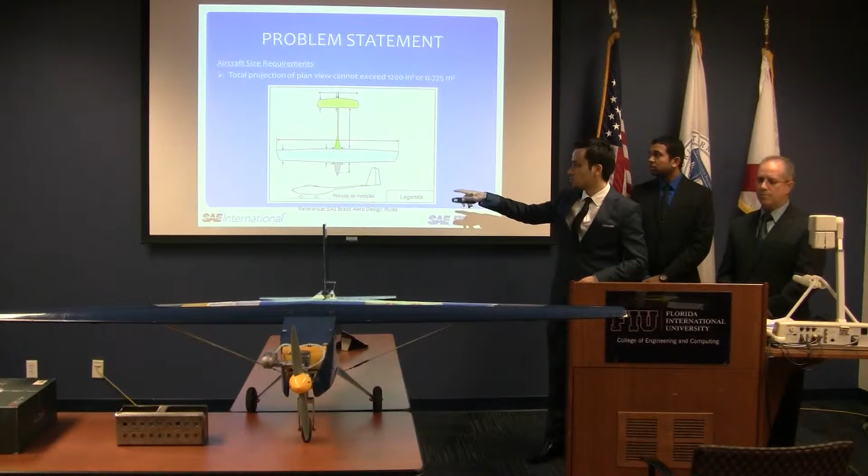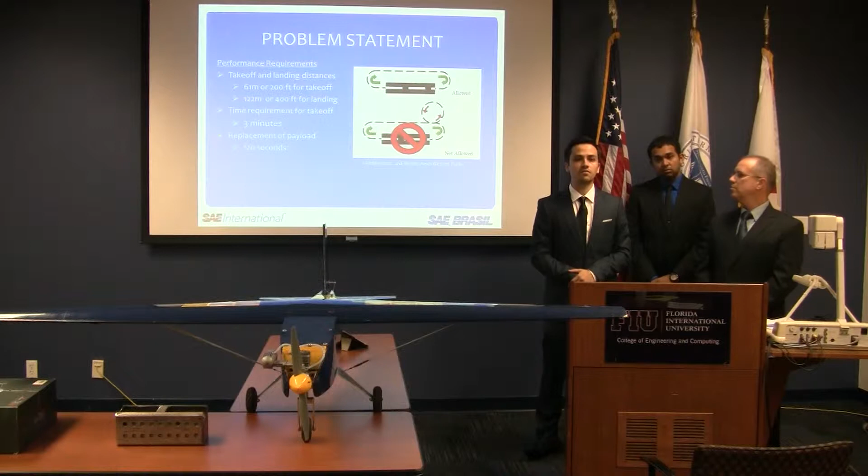A major geometric design restriction is that the top view from the airplane, the area as it's seen from the top view, planform view, cannot exceed 0.775 meters squared. Everything counts: wing, elevator, fuselage, motor, everything counts against you. This is taken from the SAE design rules. We have to be able to take off within a time span of 3 minutes from the moment the indication is given. We have to take off within 200 feet runway, and be able to land within 400 feet as well.

Some of the limitations. The rules give us, for engines that we can choose, we can only go with gas-powered engines. They gave us these engines, and we had to compare them and kind of do trade studies to see which one of them was the one that suited this particular aircraft the most, and we could not use metal propellers by rules.

In terms of our particular design, we started choosing the airfoil. The airfoil is a very important part of the aircraft, as we all know. Its profile is the one that dictates how much lift you will get, and we wanted as much lift as possible. So we wanted an airfoil with a fair amount of camber.

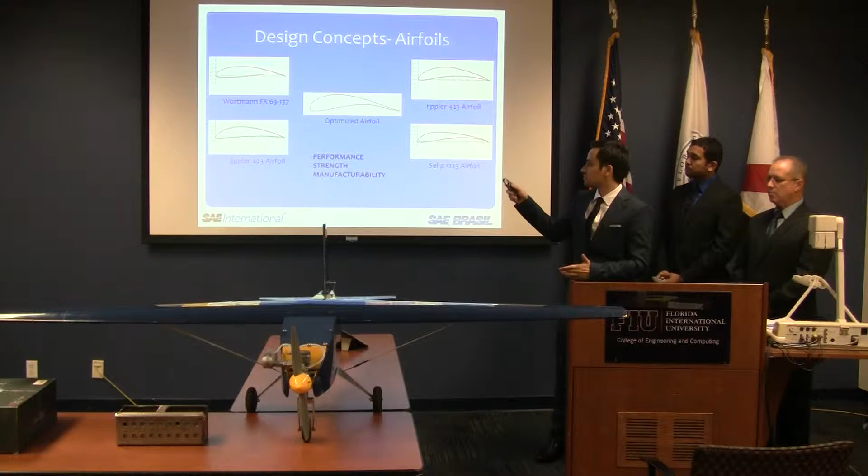Now we had these 5 concepts that came out of the literature that we researched. We compared them all, of course, in terms of strength and manufacturability, performance, lift to drag ratio. The problem with the ones that gave the most amount of lift is the fact that they were very thin in the trailing edge. That's their characteristic usually. So in terms of taking this to real life, to manufacturing this type of airfoils, it's very risky and difficult, because if you have any accident, it'll break very easily.

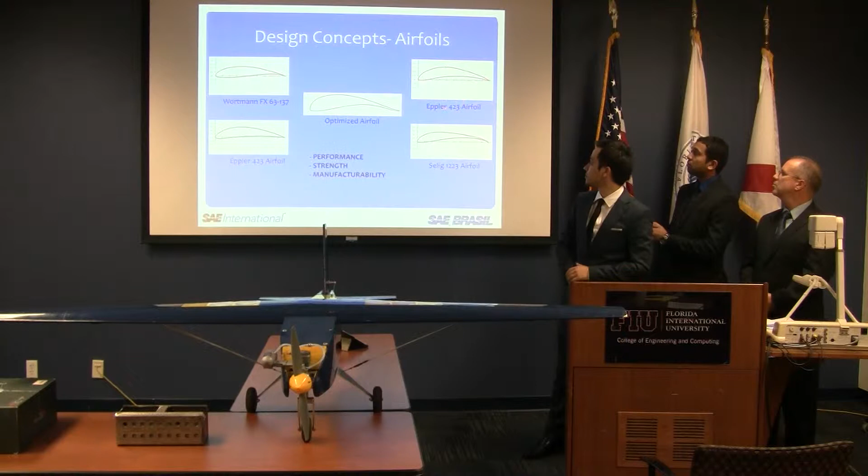So we finally chose, after comparing them all, the Eppler 423, which has a fairly thick trailing edge, but it still provides a very good amount of lift to drag.

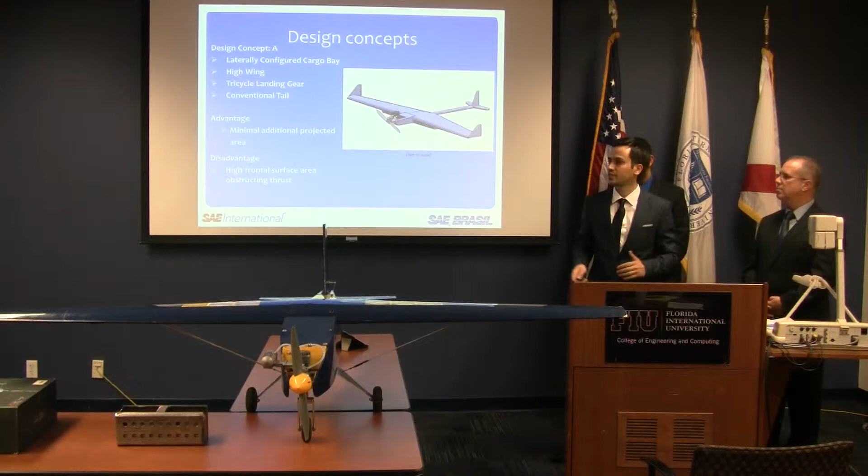And the drawback is that this frontal extra area would obstruct the air coming from the propeller, and potentially cause a reduction in lift. Of course, it was a conventional design. In terms of the tricycle landing gear, it was very conventional. The tail was a conventional tail. So we'll talk about the next design concept.

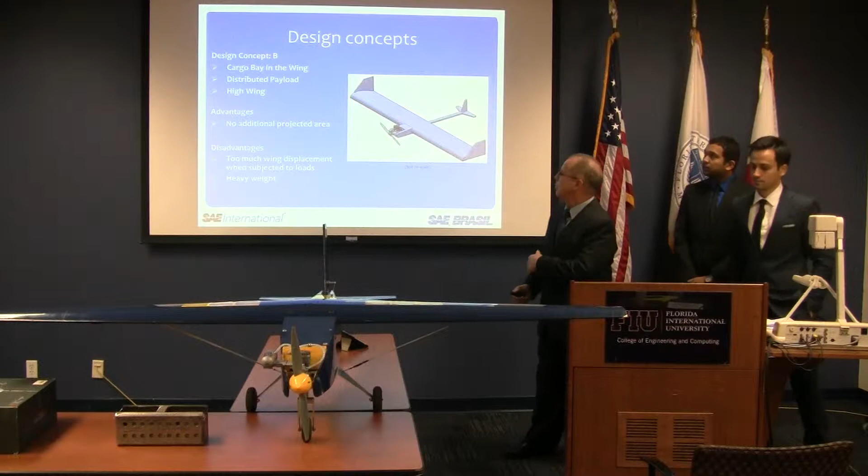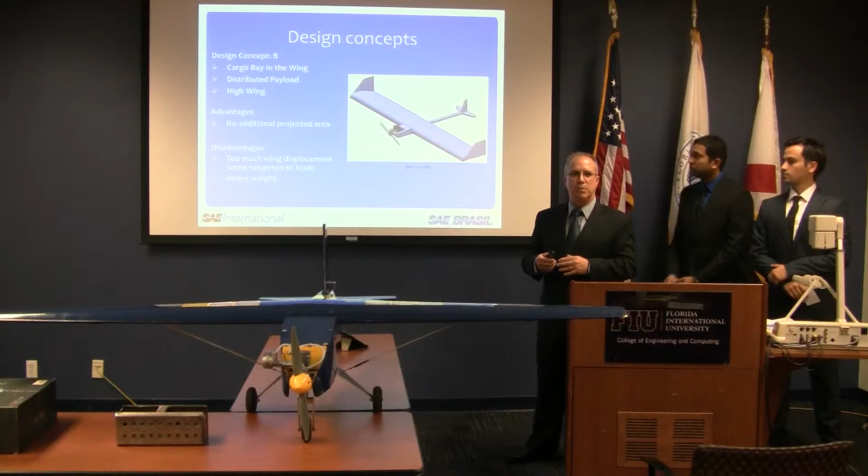Yes, as Andres was saying, after Concept A, we went to Concept B because Concept A was shown to have too much frontal area right behind the propeller, which was not a good characteristic. So in Concept B, what we decided to do was to remove that extra frontal area in Concept A and have the cargo bay distributed throughout the entire wingspan.

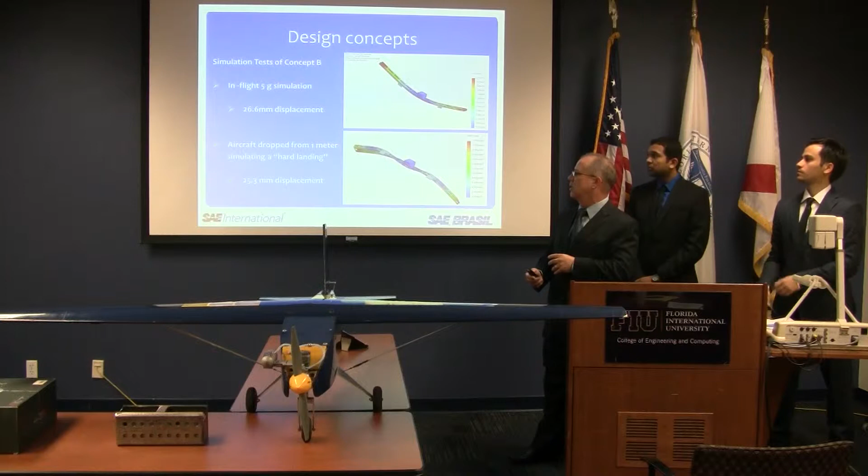Once we did that, as appropriate, we did some structural analysis. In this case, we simulated a 5G in-flight analysis as well as a hard landing analysis. And the problem that showed up during Concept B was that during our structural analysis, it was deemed that the wings were going to have too much displacement. So rather than continuing any further, that concept was rejected. This led to Concept C.

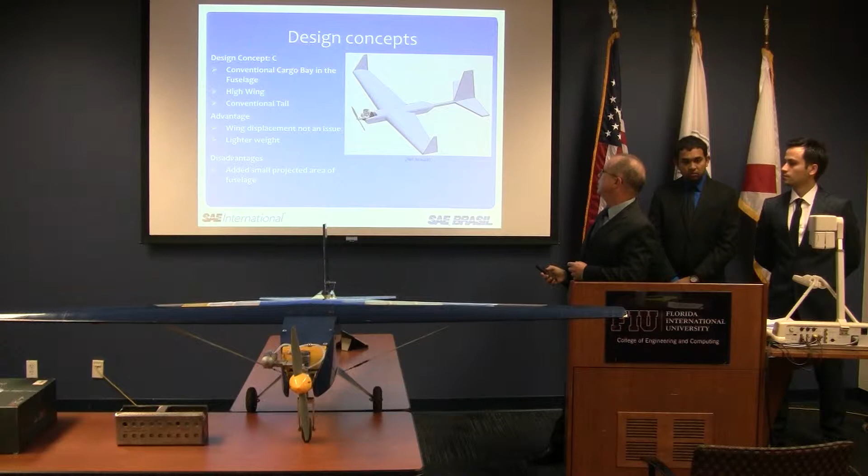In Concept C, we took the payload and we located it longitudinally in the fuselage, and we also tried to minimize the planform area by having a thin boom. Unfortunately, once we started looking at the various mounting options to mount that boom to the fuselage, it just proved to be a little bit too complicated, and we also had some concerns that it was going to be too weak. That led to our final prototype.

In this design, we went from the boom to just a conventional empennage support, which eliminated our mounting concerns, and that's what our final prototype looks like.

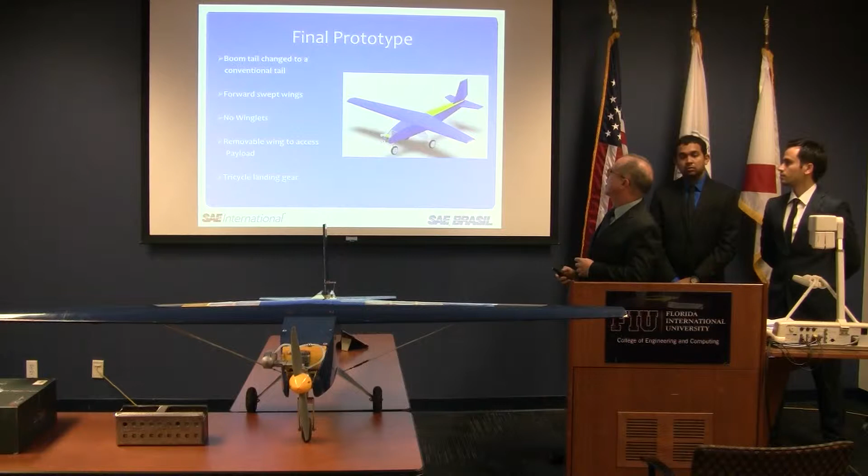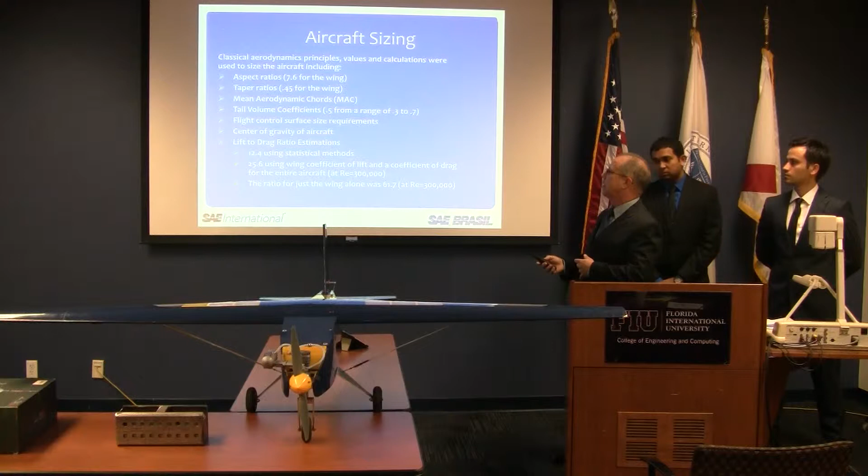Okay, and then once we had our prototype concept, it was time to start doing some more specific dimensions for the whole airplane. And at this point, there were some decisions we had to make. There were some numbers that we had to choose, such as the aspect ratios, taper ratios, tail volume coefficients. And there were some numbers that we had to arrive at, such as the center, the coefficient of drag, or the lift to drag estimations. Those were calculated and estimated.

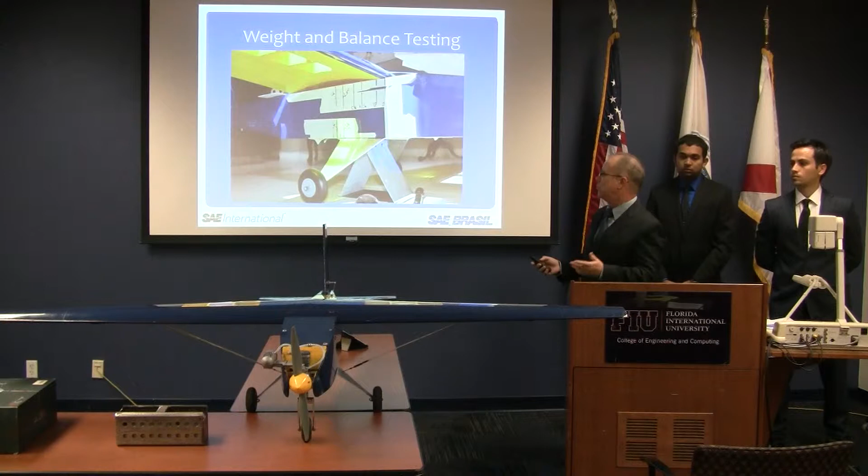Now, one of the things that we deemed very critical during our project is to maintain the center of gravity precisely, or as much as possible, where we wanted it. So as the aircraft got built and as components were being added, every so often we would go ahead and do another validation check of our CG before going any further, in case we still needed to make some adjustments. Because one thing we didn't want to have to do was add counterweight, because that would really take from our desired payload capacity, so we never did have to do that.

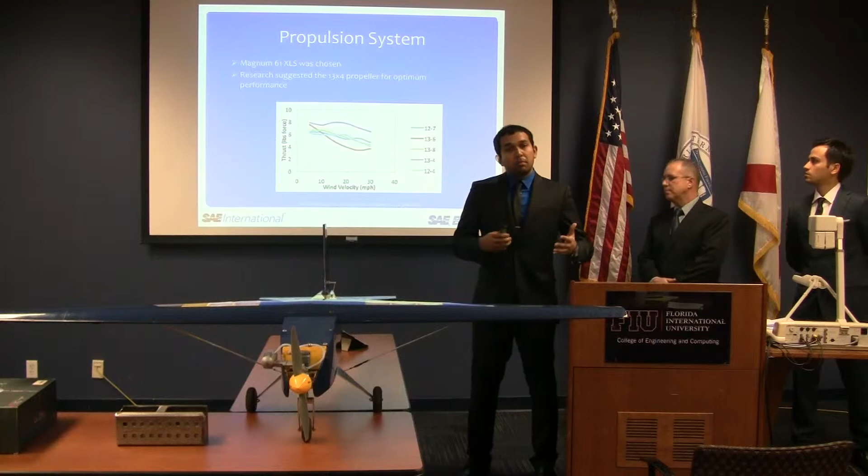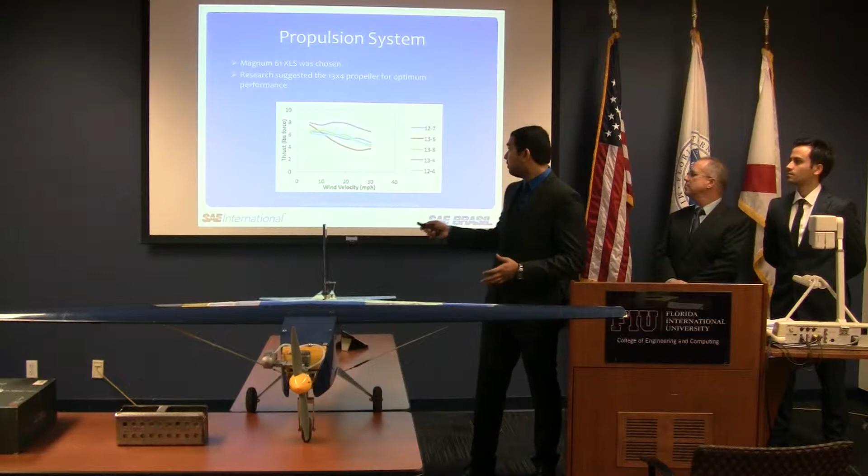Now, choosing the right propeller is the same as choosing the correct tire for a car engine, because the research suggested that the 13x4 propeller was the most optimum propeller for this engine. As you can see in the chart, University of Michigan students did a dynamic thrust test with various propellers, and the 13x4 was the most optimum and provided the most amount of thrust at different velocities.

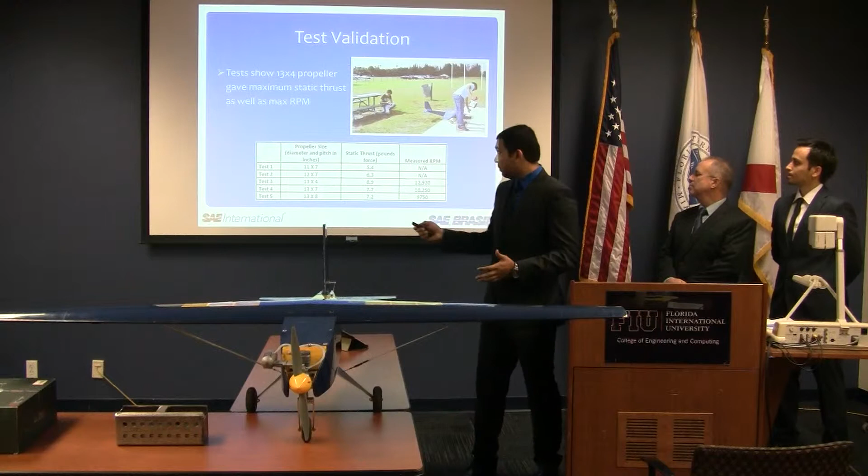After knowing that the 13x4 propeller was the most optimum, we decided to do some test validation of our own. As you can see in the chart here, we compared different propeller sizes, some recommended, some not. And the 13x4 was the clear winner in static thrust and measured highest in RPM.

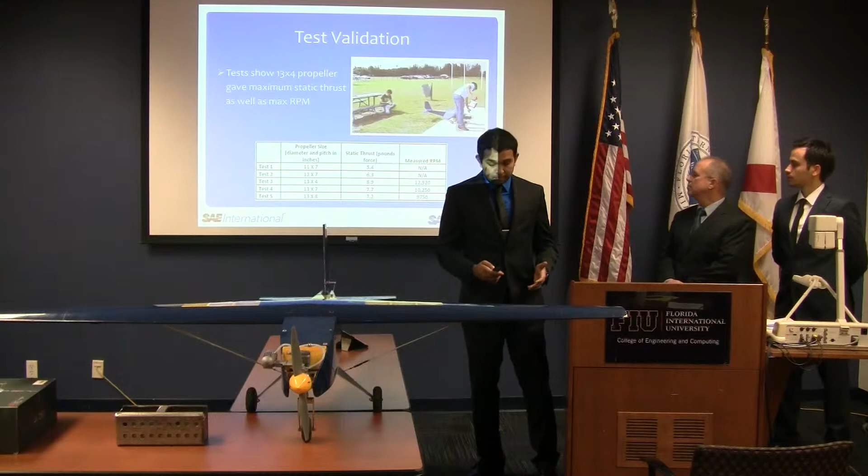Choosing the correct landing gear was very important for this project, because when we were at the design stage, we knew this plane would potentially be lifting 30 to 40 pounds. And so, knowing that there could be possible hard landings, we had to choose a landing gear that could withstand such stress. So we decided to go with a steel nose landing gear, which is 3/16 of an inch in diameter, and an aluminum main, a 6061 T6, 1/8 inch in thickness.

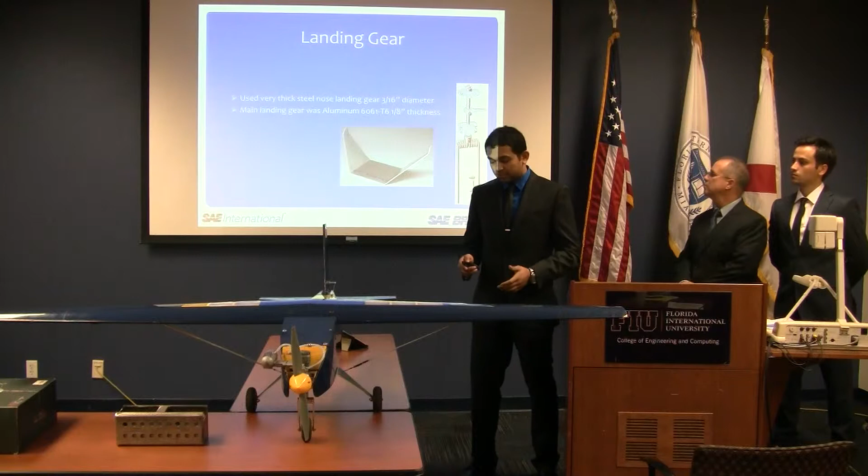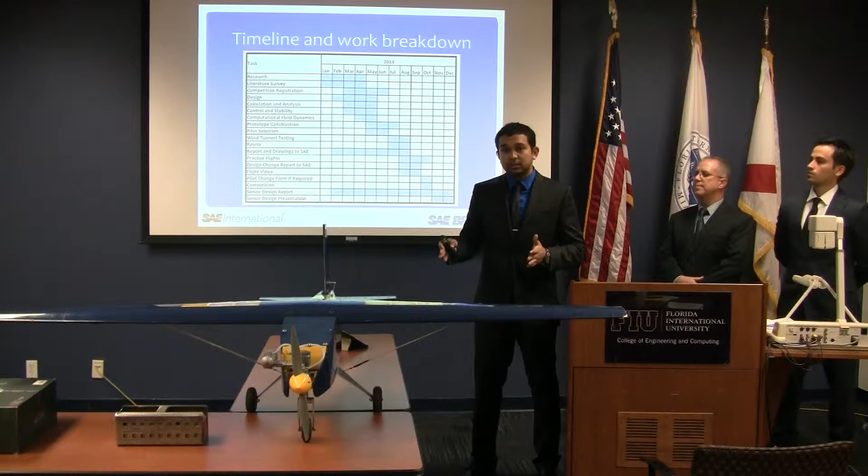The way our timeline took shape is when a lot of the dates for the competition came out, such as when the flight video was due, as well as the final report for the competition. And knowing these goals that we had to meet, we set up our timeline accordingly to make sure we met these deadlines. And I'm glad to say that we did meet the deadlines.

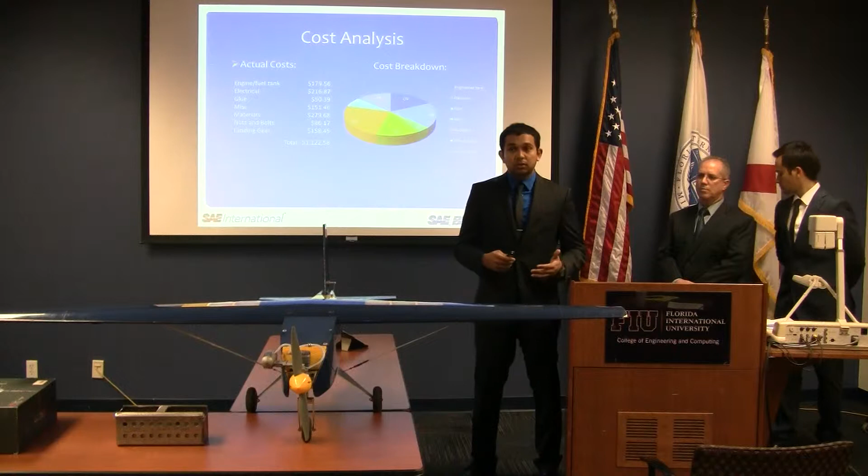Our actual cost for building this airplane ran us around $1,100. The main component of our cost was the materials, which not only included purchasing materials such as balsa and plywood, but also getting the material CNC cut, profile cut, the way we needed for the wings and the fuselage.

Once we had a lot of our analysis done, and we knew the coefficients of drag, and as Arjaf explained, we knew what we expected as far as thrust, then it was time to do some predictions of our performance. We knew that our biggest limiting factor was our takeoff distance of 200 feet. So we created a spreadsheet. We put all the formulas in there to work out, at different loads and takeoff accelerations, what could be our projected takeoff distances.

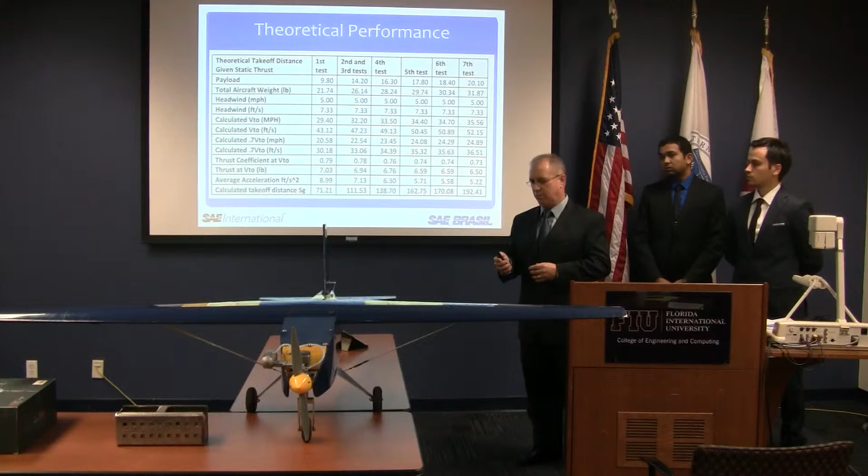And so here we see our final one, which was 192 feet, within the 200 feet that we limited ourselves to. And then here we have our actual test results on the various dates. As you can see, the 27th of July was our first flight, which was within the competition rules, and we made our video accordingly. And then on the 16th of November, we did one final flight, and during that flight we were able to lift 20.1 pounds.

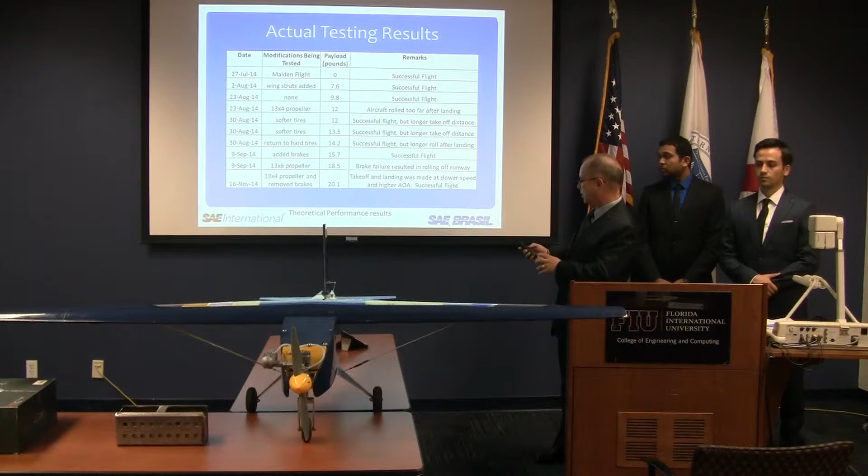We made some variations, some changes during the whole testing process, whether it was softer tires or different propellers, just to make sure. And then on our final configuration, we had no brakes, and we basically flew the aircraft the way we wanted it, and it flew pretty well that last day.

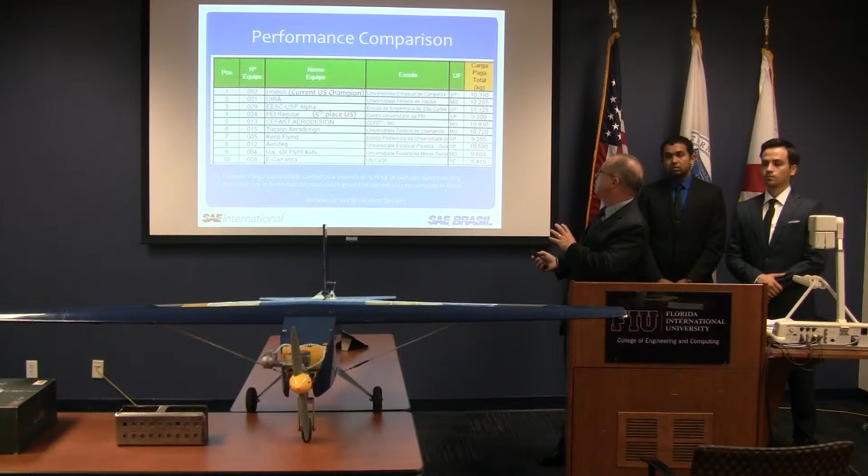Obviously, we can't measure ourselves against other teams that were there. But based on the payload carrying capacity alone, which was the only thing we can objectively measure, an argument can be made that we possibly could have placed ourselves at least in the top 10.

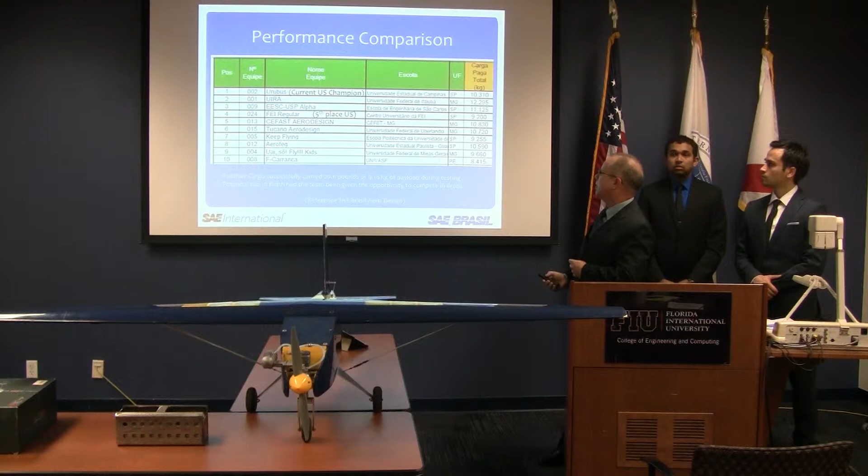Oh, and then one of the things: at the beginning of the competition, we didn't have a pilot. And since we were going to Brazil, we thought we might have to rent somebody over there. And that was a big risk and a big unknown. And we might have to make an airplane super conventional and super stable because we just didn't know what we'd get. So we started to look for our own FIU pilot within the FIU students that could hopefully help us out and fly well and so on.

So we were very lucky in that sense. We were able to find Mr. Kishan Kalpo, our pilot, and at this point I would like to introduce him to you. Thank you, Nestor.

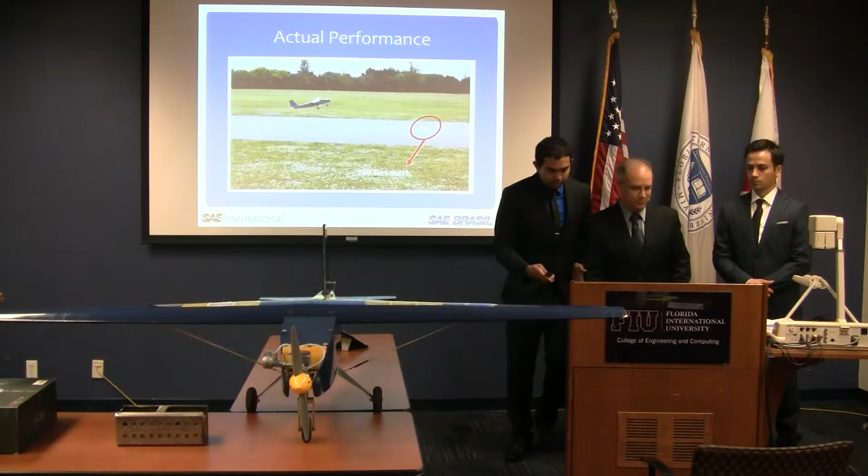Good morning, everyone. I've been flying model airplanes for 6 to 7 years now. And an important thing that you learn in the hobby is that you try to keep as much weight out of your airplane as possible. But that was not the case with this competition. And I have to say that flying the airplane really took me by surprise, because I really didn't expect the plane to be able to lift the payloads that we put in there.

But as you can see later in the video, here, the airplane takes off very smoothly while carrying 20.1 pounds. You can see that I'm rotating it early here before getting enough lift, but it takes off just fine. The wings stay level, even at a slow speed, and while still carrying a heavy payload, the airplane is still able to just stay stable and predictable, and there's no hiccups or any surprises in its flight characteristics.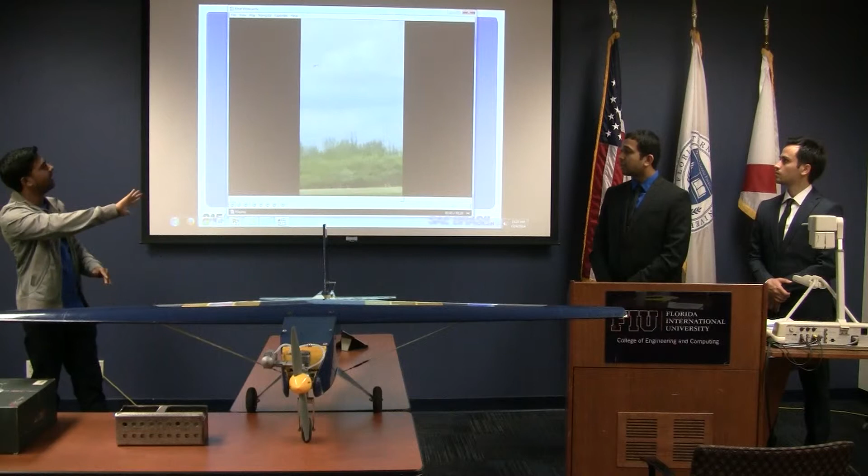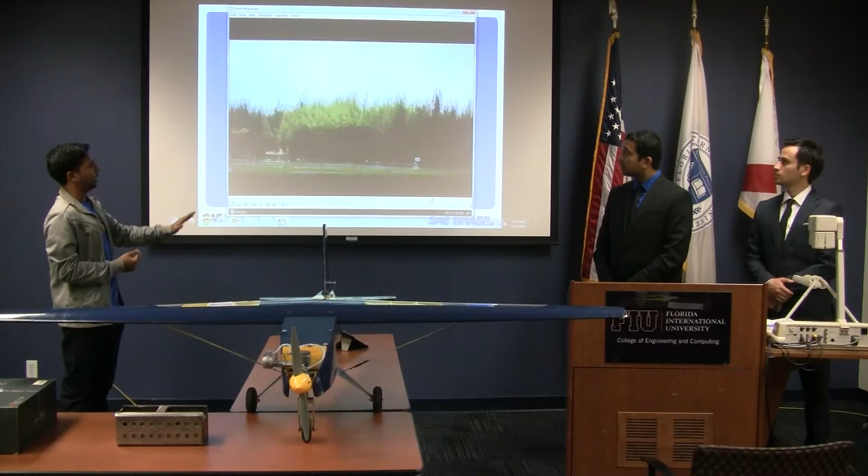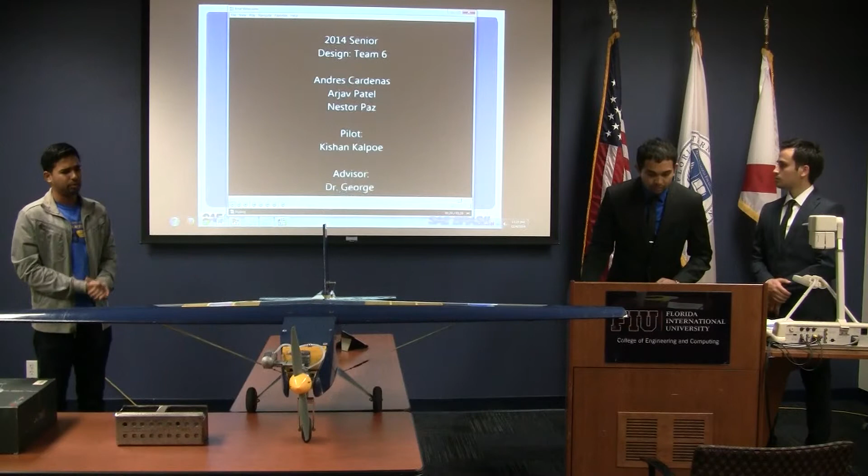So all we have to do is make one circle. So I'm making the final turn here for the landing, which is right here. I'm starting to bank it, and the airplane does not lose any lift while turning, even with the heavy payload. It's very predictable. And here I'm lining it up to land it, and when landing, the difficult part is it comes in very fast, so I had to sway it back and forth to stop it because we didn't have brakes, but it performed just fine. Thank you.

Lastly, I'd like to say that part of our motivation was to leave a legacy behind, and I'm proud to say that we are the founders of the Aerospace Engineering Club at FIU. The purpose of this club is to participate in aerospace-related competitions, to grow the name of FIU around the world, to do some community service as well, and so we're very happy with the way the club's gone so far.

We'd like to say a special thank you to Mr. Zuccarelli, who helped us design and manufacture our braking system, to Dr. Tremante and Dr. Redding to let us borrow their payload carrier as well as the remote control, to Dr. Monroe for his outstanding support in helping us with paying for registration costs for the next competition for the club, and Dr. Dulikravich for being there for us the whole way throughout the semester, being our academic advisor. And we'd like to thank everyone for their support. Thank you, guys.

You know what my question's going to be. Are any of you all here in the spring? No, the three of us aren't. He's still a sophomore. Are you staying? Yeah. Because I wanted to do the Engineering on Wheels with your plane. Yeah. It's such a great... So he'll be here. You're the next president of the Aerospace Engineering Club. So he'll stay in contact with us regarding the plane.

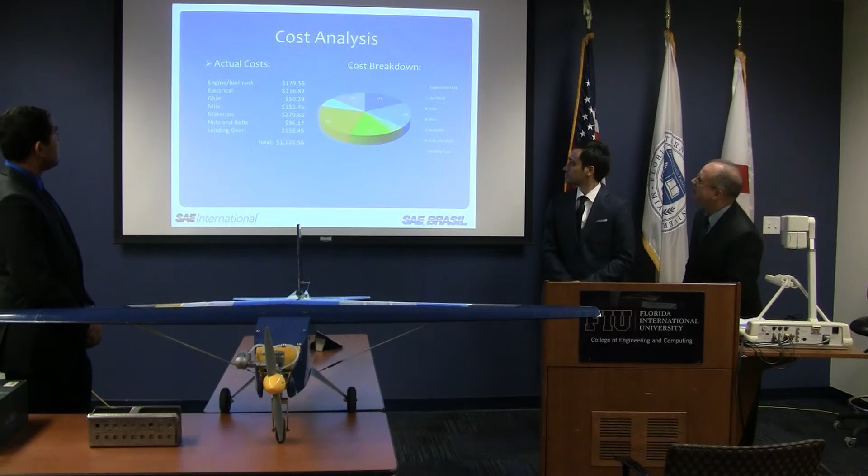Thank you. To piggyback on that, could you go to your final prototype slide, please? Final prototype. Okay. You showed several configurations of the airplane, some of which have winglets. Correct. And we all know that winglets are an excellent tool for reducing induced drag. Yes. So how do you end up with a wing like this without the winglet from an aerodynamic standpoint?

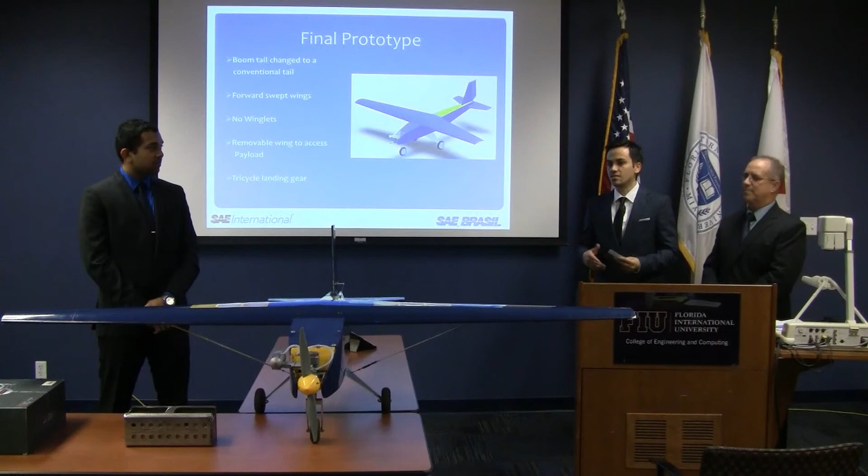I think Nestor's excited to take that one. Yeah, we did do some research on that. We researched previous teams and what were their opinions on whether or not we should use the winglets or not. But we came to the conclusion that at these speeds, in this size of an aircraft, it wasn't that much of a gain, if at all, in terms of lift and drag reduction, and that was an added manufacturing challenge. So we really looked into that, but based on the literature from previous teams, the winglets would not add a lot of value to this project.

So to Ben's point, what would have been very nice is, even if you don't demonstrate the detailed calculations you did, provide some rationale or reasoning as to why you went from this particular option to this other option, or just in the final prototype, give some parenthesis to each of those items as to how you got there, kind of thing.

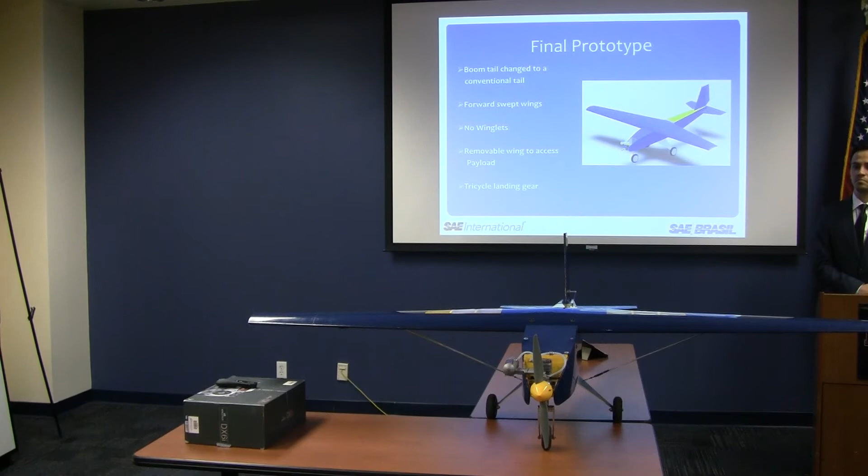One thing I just wanted to do, this is 20 pounds that we carried. I want the IAB members to at least grab it to know what it feels like. This is 20 pounds. Yeah, this is heavy. Keep in mind the plane is actually 13 pounds plus the weight of that. Wow. So that is 20 pounds that we carried, taken up within 200 feet though. When we were carrying 14 pounds, I thought, this is gonna be way too difficult. 20 pounds and it did it without problems. So by putting slugs inside plates, that's the way we put it. Strength.

Yeah, and also our pilot, because at first we had to make a believer out of him. He was scared to death. So, oh, put on some more weight. We think it's possible. And he was scared to death at first. Because, like I said, after 6 years of flying, going out of the airport, there's a lot of concern with adding to it, so I was very concerned with this possibly destroying the plane. That's really impressive.

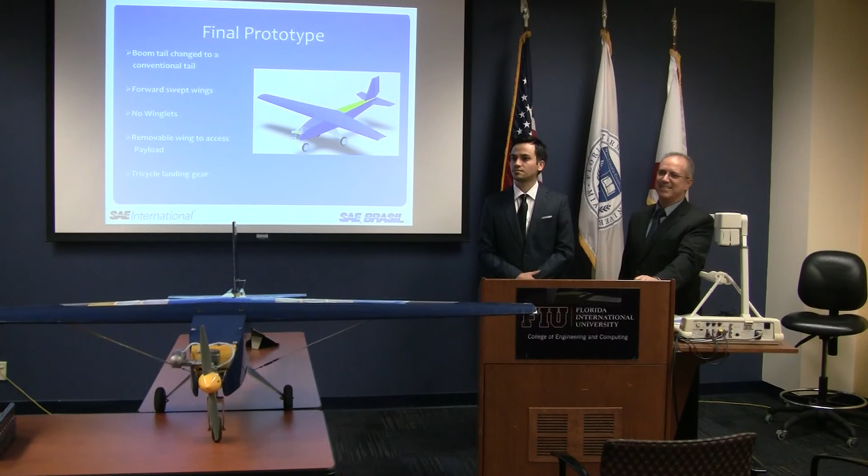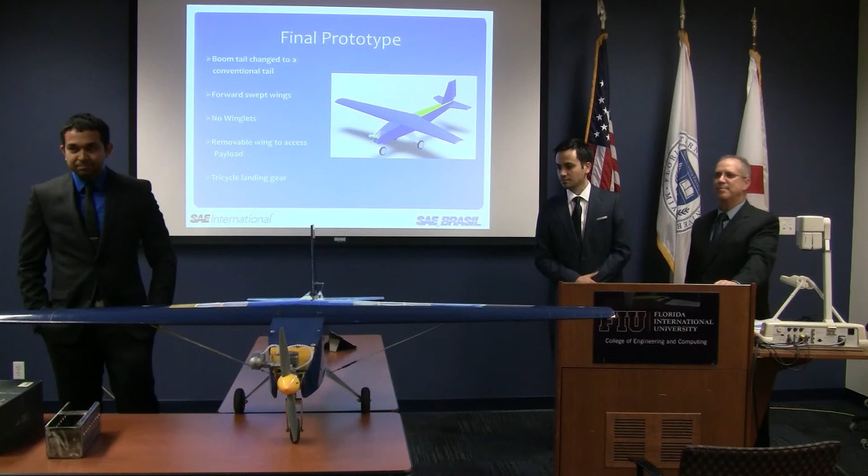Thank you. I just found out with this sidebar conversation, they did all of this with the airplane clean. Normally you need flaps when you've got all this extra load and all of this kind of stuff. They did it clean, so that's quite an achievement. So show us the science why you could lift that. It doesn't have to be so proprietary. Dr. Basil, I think this part possibly ties into Dr. Carnegie's question about the winglets.

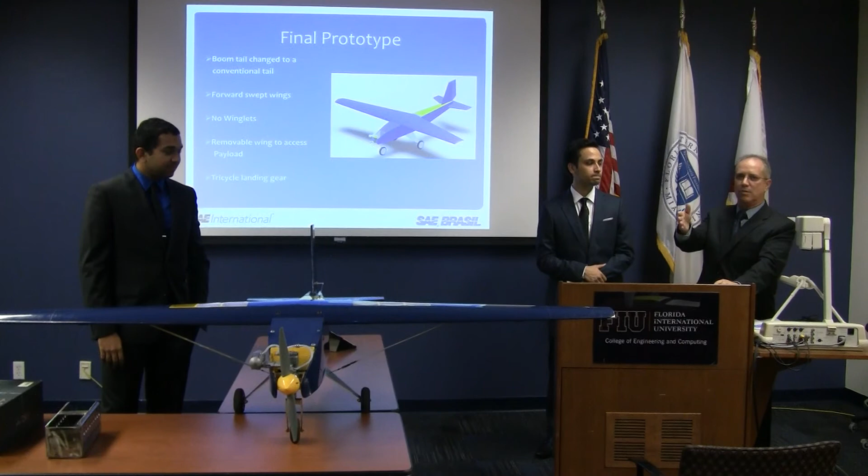This wing is technically a forward swept wing. And when you sweep the wing forward, the outflow of the air is greatly reduced. So if you have a potential gain of, say, 3% on your winglets, you already reduced that, and now you're getting into an area where you might lose the potential benefits due to, say, an increase of parasitic drag, not to mention weight. So I think that was part of the success that we had, and this wing was very complicated to manufacture. I don't recommend it, and it was crazy math to figure out our MAC and our CG and all that, but it seemed to work very well. It was crazy math.